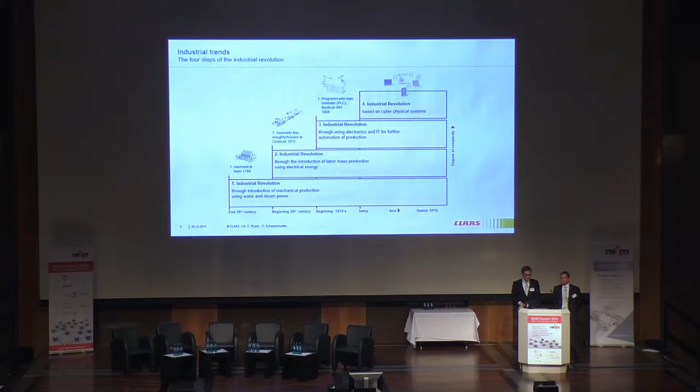Let's move in 2 or 3 steps towards the big difference between normal, state-of-the-art Industry 4.0 and this connected network aspect. Most of you will know this smart home use case - you're very familiar with networking devices, having full integration into an iPad controlling and stuff like this. Not really our use case, what we are working with.

Maybe a little bit closer already, the car-to-car use case. Talking of vehicles, very important for us as well - the machines we are building are moving, they are not fixed to the ground. What is maybe a little bit different is that our machines are networking together, trying to reach a common aim.

While we're talking here more about infotainment, or for example how to handle dangerous situations between different participants, coming a little bit closer, we have those traditional automation use cases somewhere in a kind of production with all the information the different machines are sending - for example logistic aspects or information like shipping times or capacities. Those informations are very relevant for us as well, which we then try to use to optimize those material flows and stuff like that.

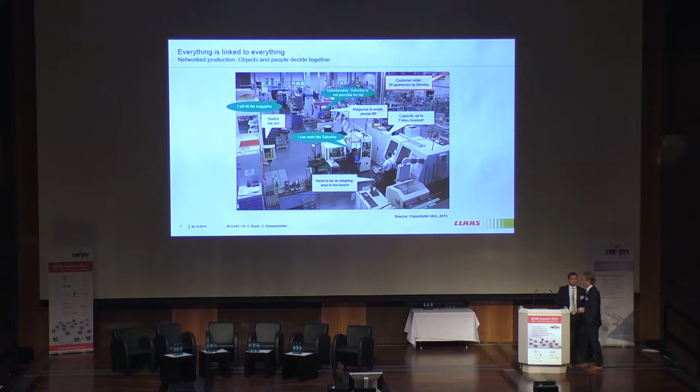Of course, you might imagine this is a little bit different for the agricultural domain. We're talking, on the one hand, of moving entities, and just to put it a little bit closer right here, as well as mowing entities.

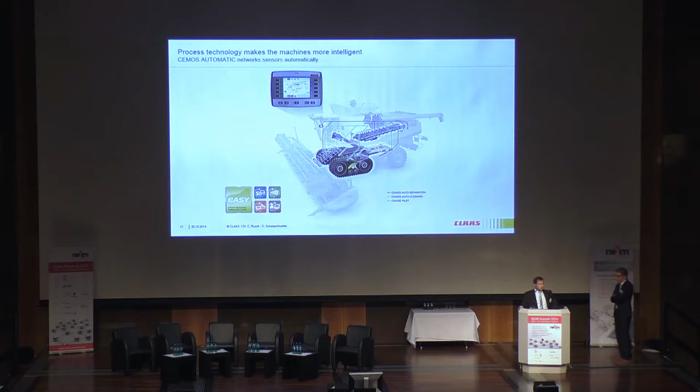The system adjusts the machine parameters of the combine harvester autonomously, because adjusting this machine optimally for all harvest conditions requires a lot of knowledge. And in agriculture we have the same challenge as in industry: the skill shortage. With the CEMOS system, the driver of the combine harvester has to choose a harvest strategy, fast, high quality, or fuel consumption, and so on, and the machine is automatically optimized.

We have a standard telemetry system, over 10 years in the market. The product name is Telematics. The technical function is a standard M2M solution. The agriculture machinery is collecting data, for example GPS position, temperature, oil pressure, and so on. And if the machine has an internet connection...

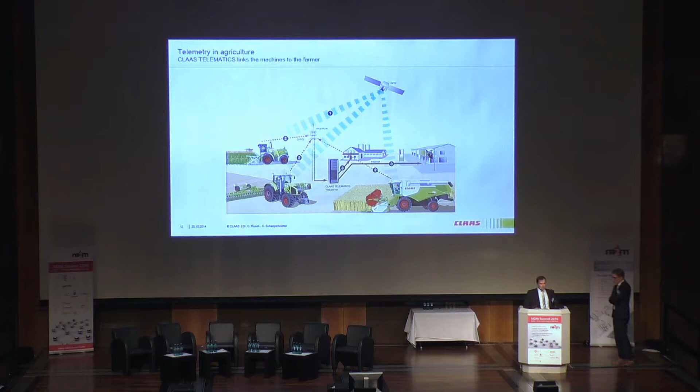Every 5 minutes, the compressed data will be transferred over GPRS to the CLAAS telematics web server. The customer can analyze the machine data and optimize the process. But this process optimization happens only in post-processing, not directly in the harvest situation on the field.

In agriculture, standardization is a necessary requirement. Because in agriculture we have heterogeneous machine fleets. One solution is the ISOBUS. This is based on a physical CAN bus, a communication interface between a tractor and an implement. Here you can see the communication between the tractor and the baler.

With the standardized interface on the implement, it is possible to receive all important performance and harvesting data, not only tractor data. This collected data is transferred over GPRS to the CLAAS telematics web server and documented and analyzed.

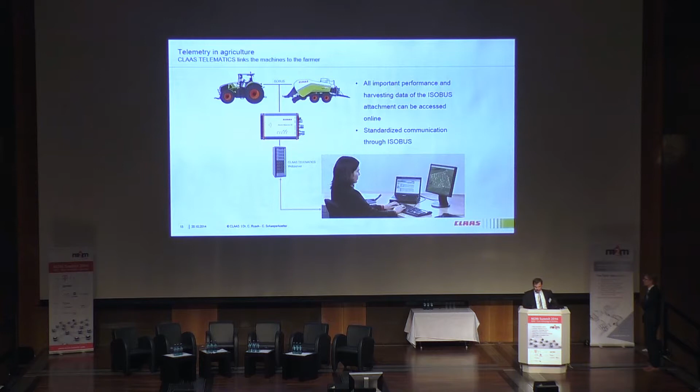But no farmer has this logistic machinery on his farm. Maybe we can spend two or three more words on that. That means for the operator of this harvester, the Lexion 770 Terra Trac, if he wants a running logistic chain, he has to provide 5 tractors with all of the logistic trucks and whatever else needs to be provided in the back to ensure that we can build up the whole logistic chain. That means as well that most of the tractors wait most of the time, right?

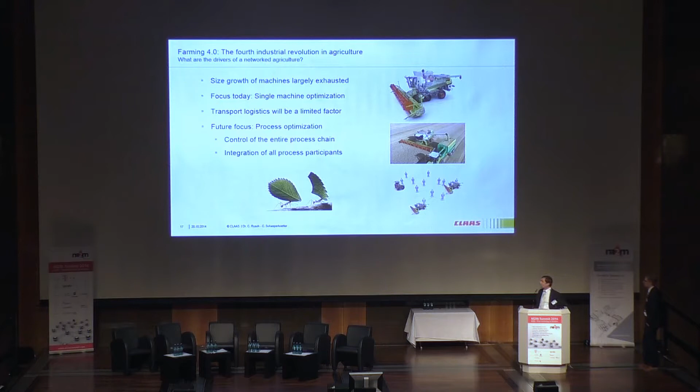That's our vision: the networked machines act as one unit in the process. Every process partner is connected to the process network. The customer only has to define the process objective - efficiency, speed, time, or fuel consumption - and then the CLAAS machines work together on the field and achieve the defined process objectives.

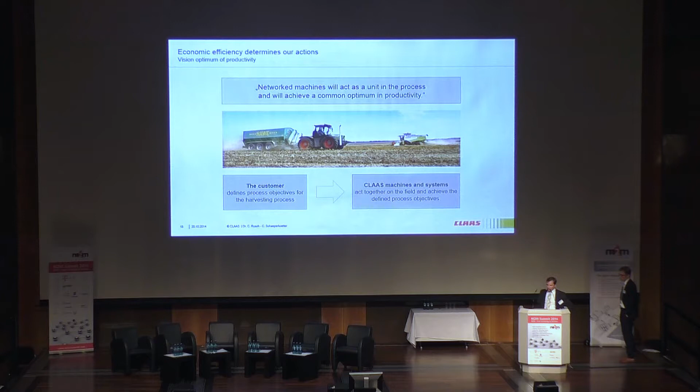For networked machines, we need M2M connections or M2X communication. The ability for communication within an entire process is of high importance, with or without publicly available infrastructure.

The most important requirements and constraints are these. First, in Europe we have only heterogeneous machine fleets, so we have to standardize this communication between the machine on the field and the infrastructure. The next challenge is that communication is not always available.

In rural areas, this infrastructure communication is not always given. The next challenge is the global availability of mobile communication - the different standards and frequencies - which we have to solve. And the last one is secure communication between the machines and the servers and so on.

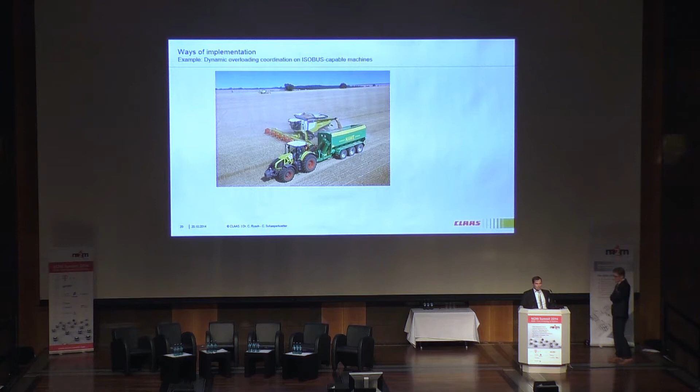In the next slides, Mr. Schäperkötter will explain some applications and solutions. Okay, thank you, Christian.

Dr. Rusch already pointed out that we have today technologies, for example, aiming on this combine harvester, sending out information by a telemetric system home to the server. He also pointed out that we need to connect all the machines to get this huge potential for process optimization, and that we need some more technology solutions for this M2M scenario. Within the next three slides, I will try to explain how CLAAS tries to discover this potential.

Keep in mind this use case: having, for example, two combine harvesters right here, an in-field logistic tractor right there, and a couple of trucks at the street or on the road, trying to bring all that wheat back home or to the mill.

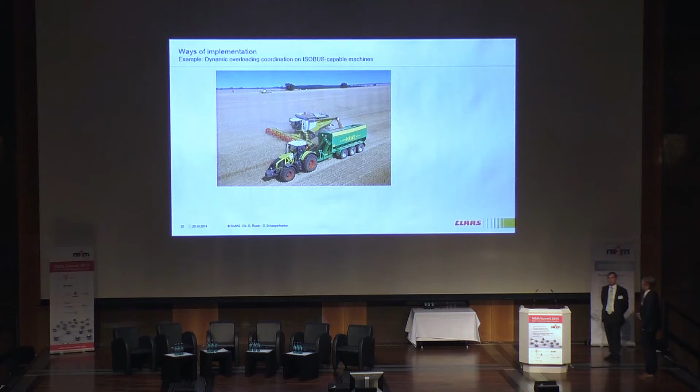So we first focus on trying to create transparency for all participants, especially those who really need this information. For example, it's nice to know for this combine harvester how full the grain tank is. It's very important for this tractor to get this information, because he is the one who decides whether to first try to get all the wheat from this combine harvester, or first drive to this one.

And then bring all the wheat to the trucks on the road. So the first step for us is to try to create transparency, especially not only for big machines like here, but also for those machines that we see out there in the processes of our customers. That means there are not only nice green machines called CLAAS, but also maybe some machines from our competitors that we have to get into the process, for example by using the ISOBUS standard Dr. Rusch already introduced to you.

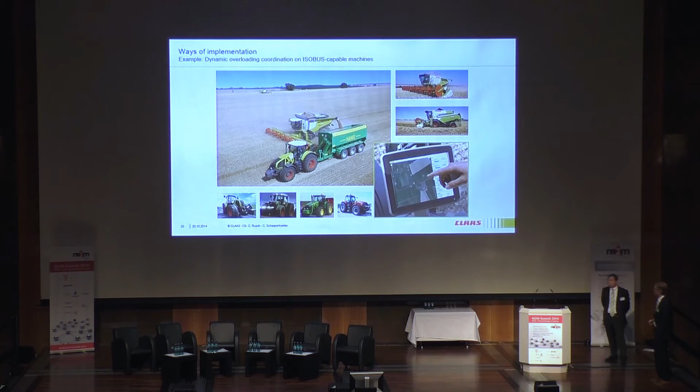So first transparency, then second, once we have all that information, try to get into these assistant use cases. For example, trying to point out where the meeting points, the rendezvous points, between this tractor and this combine harvester might be, using the information the combine harvester is producing all the time and mixing it with the information of the tractor concerning, for example, the location.

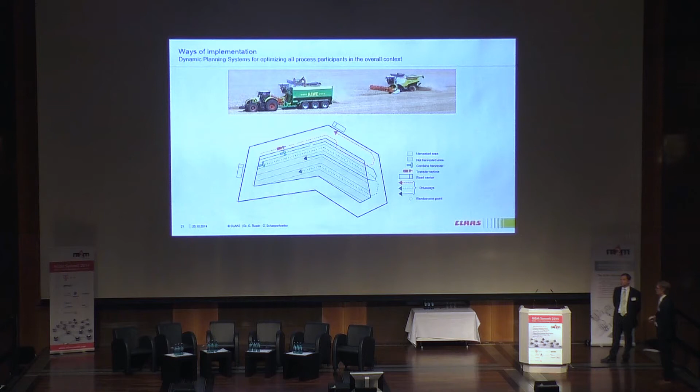And then leading step by step, service by service, from data, just pure data collection that we already have today, to different kinds of planning or assistance in planning.

Especially what we saw in the field before, ways to optimize logistics performance in logistic processes, and monitoring the different operations there, and then step by step try really to get into the different chains, and as well get into, for example, the next chain.

What we see right here is already the following process after harvesting all this wheat: plowing or creating already the basis for the next seeding period.

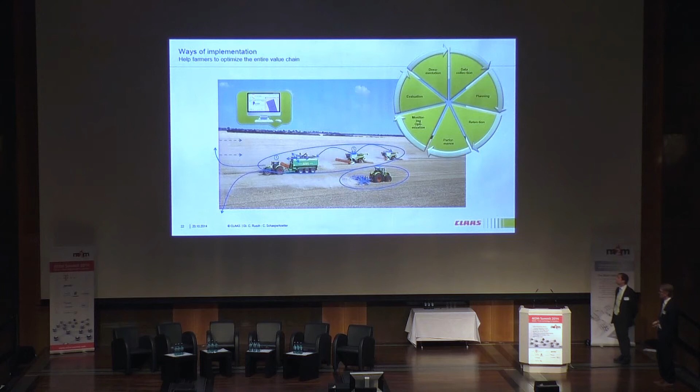All this, of course, needs a very intensive interaction with our customers. It's new, more or less, for a machine manufacturer like CLAAS, but of course, there's a first solution coming out as well.

Last year, we launched a so-called 365 FarmNet portal that brings together different manufacturers of different services in the agricultural domain. I will show you some examples later on.

It's a portal that accompanies the farmer all around the year with some more or less ERP functions, but as well some functions to optimize then processes in the field.

So much more than a traditional ERP system. And as I just promised, to give you some examples right here, trying to collect services, system-based services from the producers of seed.

Then trying to integrate these implement manufacturers. We already had this example of Amazone, trying to get the producers of fertilizer and stuff like that.

For example, Bayer right here, as well as third-party service providers like the Allianz here, who provides us with satellite data and stuff like this. All of this then needs to come together to have a really full customer-oriented solution.

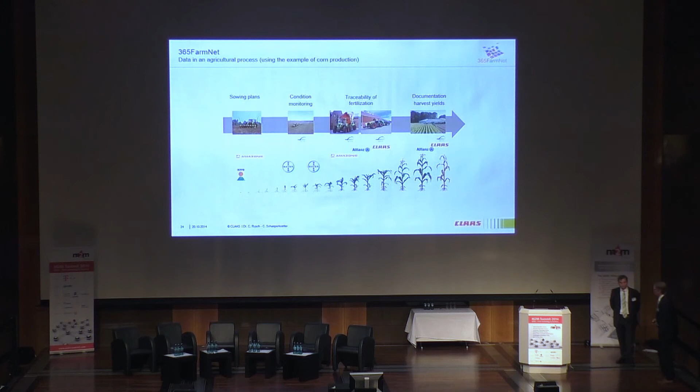For this farming 4.0 scenario. And hoping to introduce this scenario to you within the last 24 slides, we now come to our conclusion.

And if you still then have some open questions, we might discuss them then finally.

So conclusions from our point of view, from the industrial point of view: well, we're traditionally talking about, as was already mentioned in the introduction, heavy metal traditionally, but today more and more we talk about smarter or smart farming aspects.

And networking machines, not only about telemetrics. And what is getting obvious during the last years is that this traditional system boundaries between machines, humans, and the environment fall as well in our domain.

This leads, for CLAAS, it's a little bit new, to a new kind of interaction between us, different competitors, and our customers. And well, already mentioned, those technological aspects like a safe and stable infrastructure must be given.

To realize these new scenarios, we are working on new distribution and delivery channels to integrate our customers and as well our competitors.

And well, if we manage to do this, we are quite confident that this leads to a strong CLAAS market position, especially due to the fact that we are aiming, of course, on the top of the market and on a premium product. So far from us, I guess.

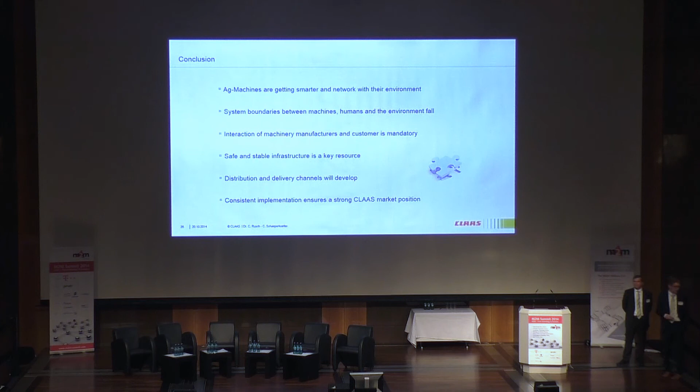I did. One of the things I wanted to know, you talked about the drivers for this. One of the things that interests me is this kind of top-down or bottom-up. Is this coming from the technological capabilities that you can take to your customers and impress them by what they can achieve? Or is this being driven by customers bringing to you problems and situations for which they need a solution?

It's both. On the one hand, of course, there's a technology that's available now. You did your PhD on that, but you brought it already onto a farm. We brought it onto a couple of farms this season as well. And then, of course, both met.

On the one hand, the technological capabilities, and on the other hand, for example, as we were talking of taking all these test scenarios, test equipment back to Harsewinkel, our customers told us, hey, please do not do that.

Please come back next year. We have some new machines here, let's try it there as well. So it's a little bit of technological push.

Of course, there's a kind of initiating stream coming from the R&D departments, but especially our professional customers aim on such assistance systems, aim on getting help in their processes due to the fact that the processes are quite complex.